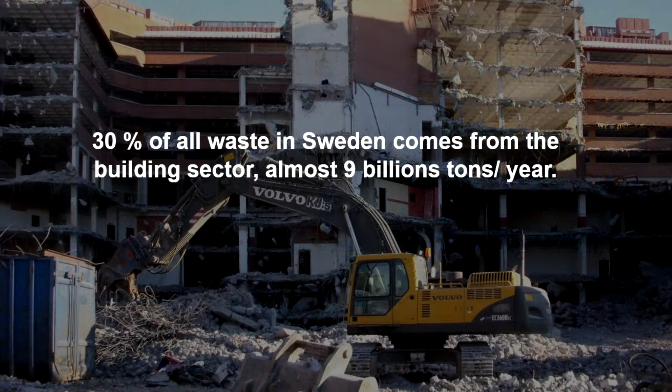And also, 30% of all waste, and I'm talking about Sweden here, comes from the building sector as well, and this is general all over the world. So we also have to take care of the building stock that we have and see: do we need to tear buildings down, or can we repurpose them so that they can live on longer? And of course, when building new, we should make buildings that people actually want to live in for a very long time, so we also think about the next generations that will use these buildings.

White is a really big firm, about 800 people, working in lots of different fields within architecture. But we're gathered under one vision, and that is for all our projects to be climate neutral by 2030 through design excellence, following the Paris Agreement and reducing the environmental footprint. We believe in enabling sustainable life through the art of architecture, and we span from housing, offices, hospitals, schools, urban planning, landscapes, to interior design.

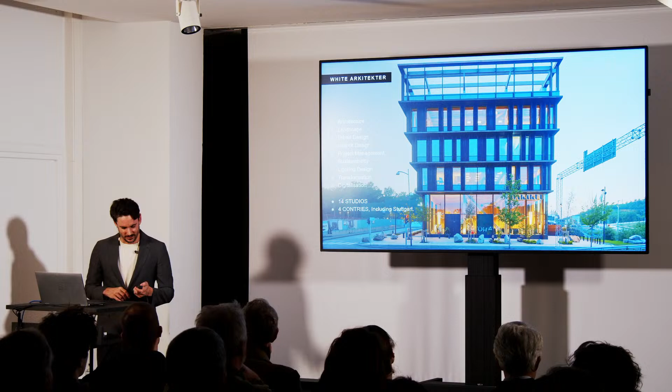We also work with a lot of sustainability and digitalization experts in a holistic approach in all our projects, from the very beginning of the design process to the end of the project. We like to collaborate, so we have all these different disciplines in-house. We are 14 studios in 4 countries, and we just started a studio in Stuttgart, which is quite small yet, I think 8 people or something, but we were commissioned for a big hospital outside of Stuttgart. So I think that's our main building in Germany.

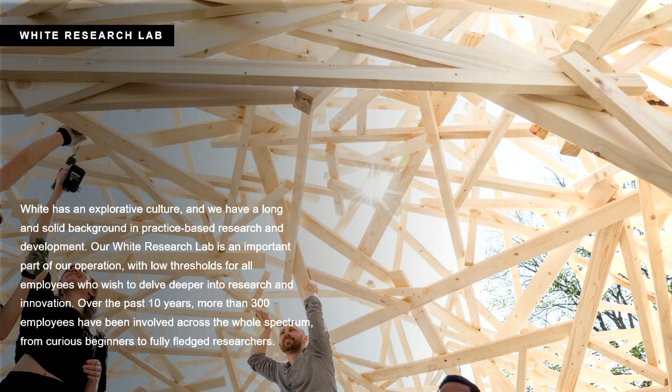We are employee owned. So when you start at White, you can buy in shares, and then we have a program that the longer you work there, the more you can buy in, and after a while hopefully you get a partner. So basically we can do whatever we want with revenue, and we like to reinvest it back into our office, basically. And we channel that through White Research Lab, we call it.

And then we have different focus areas where we study mostly project-based research, but we collaborate with scientists and Swedish research institutes as well. And one of these channels is timber, and that's the background, basically, of how we're investigating the use of timber and the characteristics of the material in new projects as well. As a result, the Sara Cultural Centre is one example of that. We also have other examples.

We're trying to find not only timber, but also, for example, here we have a rammed earth that we are using for stabilizing walls. And this is in a hospital we just won somewhere in the UK, where the most part is going to be timber, but also this rammed earth, which is locally produced in this region as well.

And here you can see the interior of the common areas in this cancer clinic, basically. But then there are parts that are not able to work with timber, so then we have to use concrete. But then we're trying to find a typology that has the lowest impact on natural resources and CO2 emissions. Another project that I'm working on right now was a competition win in Riga, Latvia.

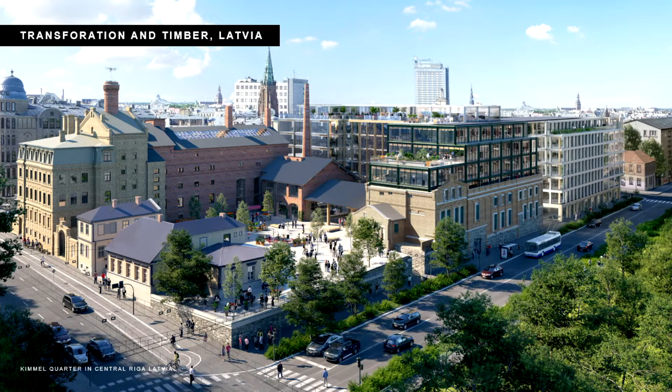Here we have a combination of timber offices, a new build, and the transformation of an old brewery. This is in the city center of Riga. It's about 50,000 square meters. And here we are pushing the national legislation on how tall you can build in timber. So we're trying to make the authorities approve, and they already have actually, us building 7 stories in timber with exposed timber

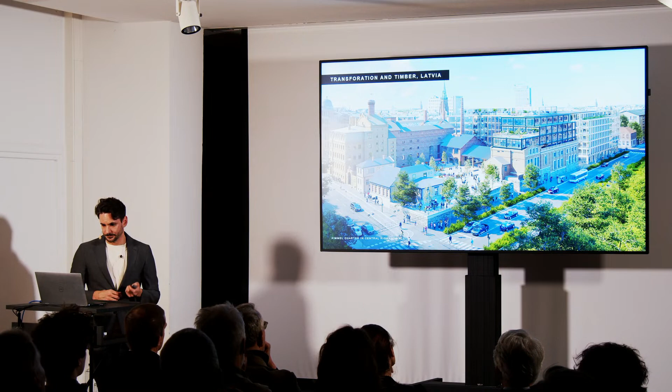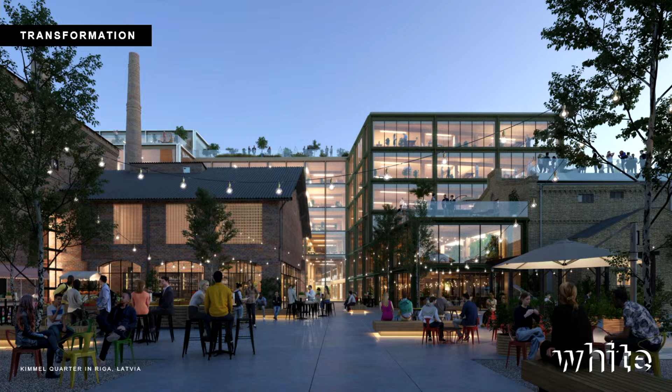in Latvia. And also here we have a holistic approach: not just the operational energy, but also how we're placing the volumes to make as low impact from this building as possible, or the emissions. And also how we can convert and save as much as possible of the old brewery as well. And here you can see the transformation, with the old and the new together to create this living hub for the residents of Riga, basically.

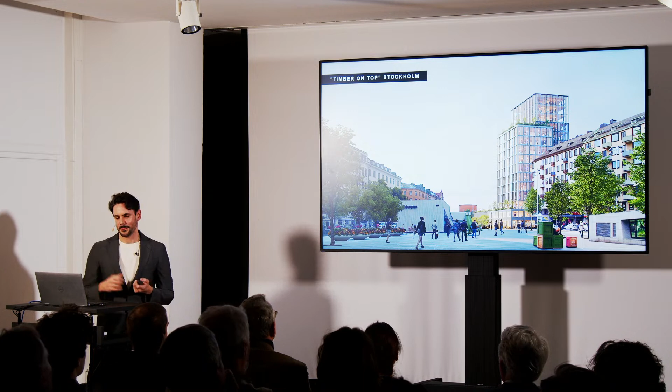This plot is an existing tower from the 60s, which has been worn down, the facades are broken, and the floor-to-floor height is very low, so it's not an efficient building. So the client decided, let's tear it down and rebuild a new one. And our proposal was, why don't we use timber as a construction material instead? And the location is very central, in the absolute center of Stockholm.

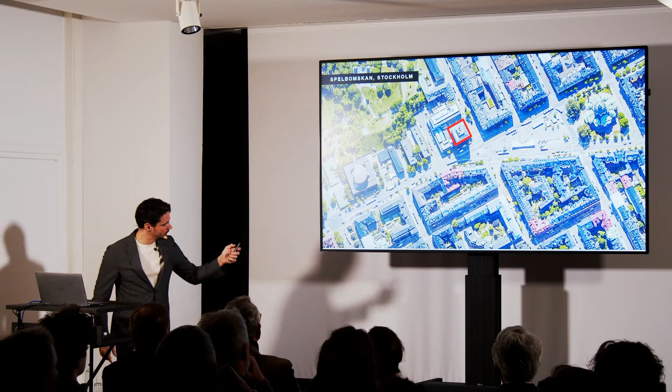And here, I can try this one. I heard it was really hard to.

Here is the Asplund City Library, which is very famous in Sweden at least. And it's an iconic building, so it's a very sensitive area to work with. But our proposal was to only tear down everything above ground. As you can see, there's a basement over 5 stories down, and underneath that's the metro. So it's a very complicated situation.

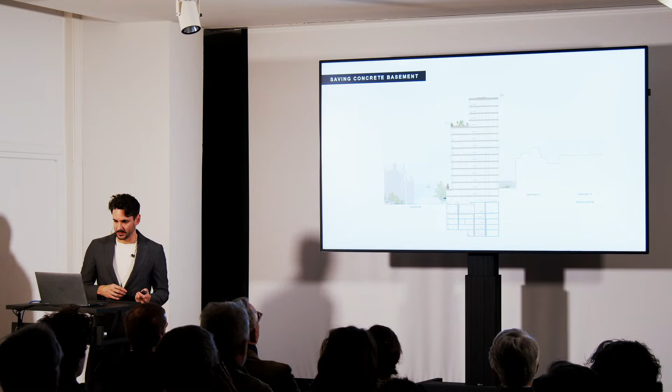And by doing this in timber instead of concrete, we were able to save the basement, and therefore also save the emissions that would have come if you had taken that away and rebuilt it again. And also you get a new atmosphere and a new vision for the entire situation at Odenplan, as this is called. And yeah, this is just a plan. I hope you can see it.

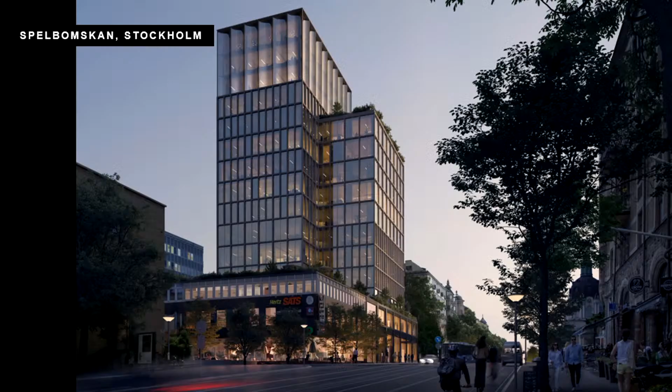It's a quite structured plan where we're working on optimizing the spans of CLT and glulam pillars, trying to stabilize with only one core. And also this is a vision for how this could be realized, basically. I couldn't find a before picture, but we're trying to work with the old aesthetics, but with a new appearance. And this building is a little bit taller than the previous one.

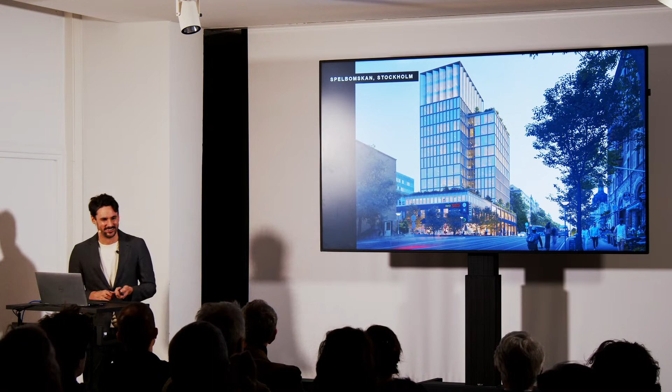And hopefully it will be standing in 2028, but we'll see. It's a long process. But today's main project is Sara Kulturhus. This opened last year, and I've been traveling the world since talking about this project, which I'm very happy and honored for. But also, the people of Skellefteå are really proud, and they also travel around the world

and talk about this. It's 20 stories, 75 meters tall, a locally sourced FSC-certified mass timber building. It's a culture center and a hotel, and the thought is that together they are going to benefit from each other. And it's one of the keys for the city of Skellefteå to break a downward trend of depopulation, become a more attractive region, and grow from 70,000 up to 100,000 people over the next 10 years.

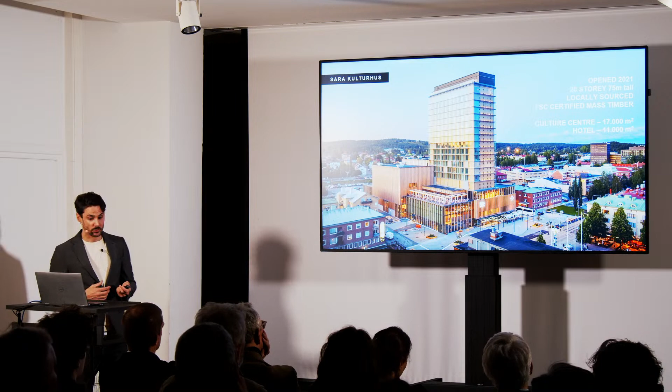It's surrounded by forests. So basically, Skellefteå is where it is because of mining and the forests. Sweden in general is 70% covered by forest, and 95% of that forest is managed forest. So we have a long tradition of working with timber and also working sustainably with timber. We are replanting every tree that we take down. We replant with at least two. So there's been afforestation in Sweden over the last 100 years. There are much more timber sources now than we had 100 years ago.

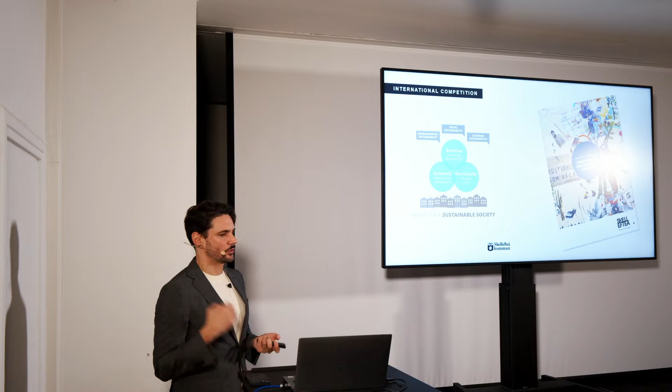So with that in mind, we entered the open competition in 2015. It was launched by the municipality, together with Swedish Architects. It didn't say anything about the use of material in the brief, but Skellefteå has this strong timber heritage, a strong timber industry; they had one of Sweden's first CLT sawmills, for example. And part of the university in Luleå has its timber branch located in Skellefteå. So yeah, they know their stuff.

The site is the last unbuilt site in Skellefteå, and it's the most central site as well. It was actually planned as a public building when the city was planned 120 years ago or something. But they couldn't really find a good solution, so it ended up being a bus station instead. The site slopes down from the train station towards the main square, and then down to the Skellefte River.

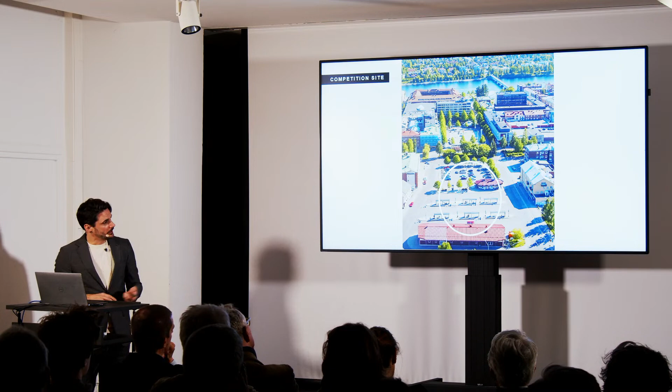So this gave us the opportunity to use a split level, with two public floors with access to the surrounding streets. Our concept was to work with all the stages. It's quite an intense program, but we placed the stages side by side in the center of the block, and the cultural program fills the entire block around it, facing the street, so that people could take part in what was going on. The building becomes bigger than it is, with entrances all around the block, creating no backsides.

We're also working with adjusting the scale and height to its context, and connecting this building, because it's quite a big building and it will change the scale of the CBD of Skellefteå. But we wanted it to be part of the existing as well, even though the city skyline will change over time as the city evolves. It was also important to create new public spaces for the inhabitants of Skellefteå, so that they can explore the city from a new perspective.

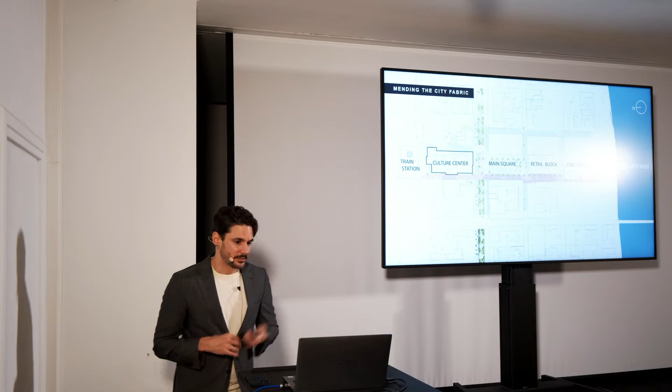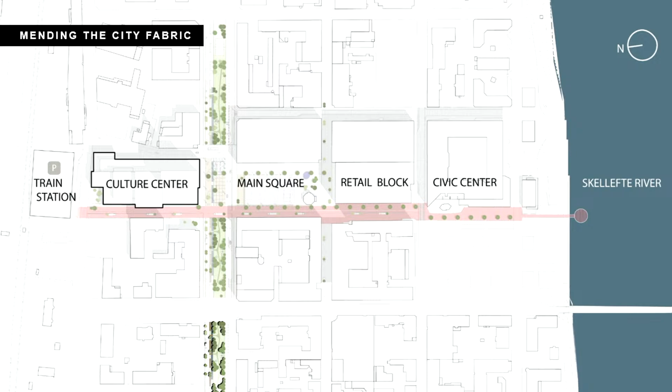So basically, the Cultural Centre takes part in mending the city fabric and becomes a destination that runs further than the actual building. And the pink line here, following down to the Skellefte River, is like a culture walking path instead of cars. This is going to be like a culture Broadway, following down to the stage located in the water.

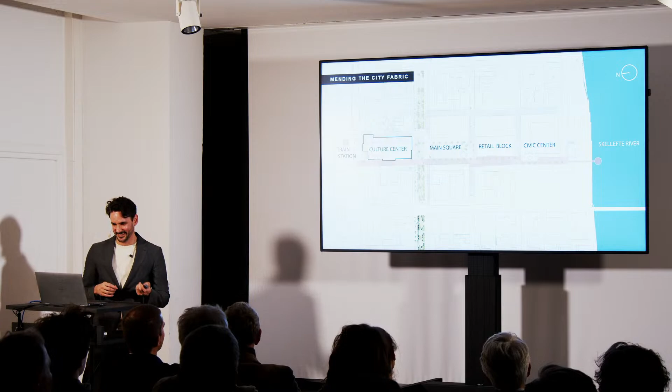Mending the street. We wanted to work with timber in the design, and we wanted to expose as much timber as possible in the facades, but we also wanted people to see what was going on inside and experience the timber inside as well. So we had these big glazed windows, letting all the expressions inside come out and lure people and passers-by into the building. So even people who are not interested in or don't know about culture, we want to attract them as well.

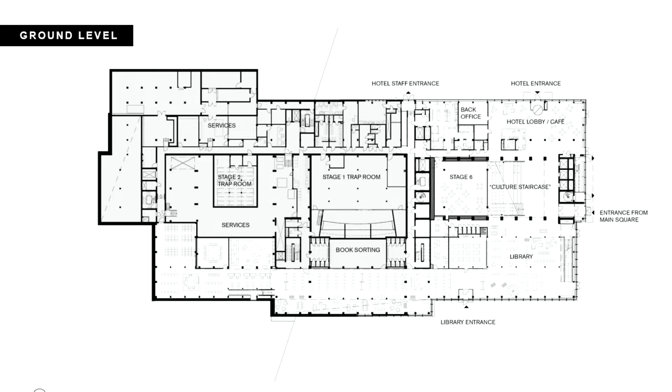So the ground level, or the lower split level, facing the main square, you enter underneath the high-rise, and then you come into this really big hallway, which connects all the different functions in the building. Here we wanted to put the hotel lobby, the cafe and the library, the source of all-day living, a flow of people walking and crossing.

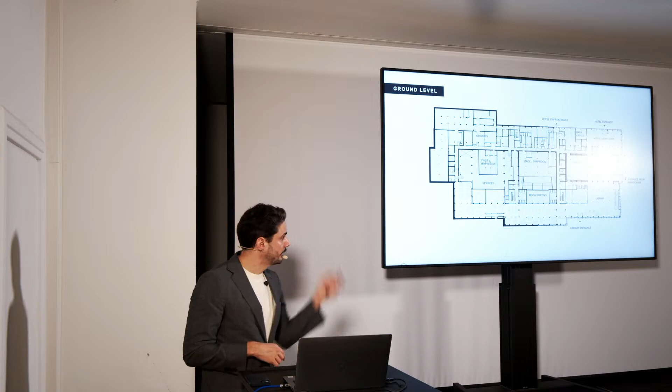So it was very important that the library took place in this corner, and it's not an enclosed library. This library is connected throughout the entire cultural center. There are no boundaries. You can borrow your book, sit anywhere and read it, and then have a coffee at the cafe or the hotel lobby. So you feel that you are under one roof, under the culture center, whether you're a guest at the hotel or someone borrowing a book.

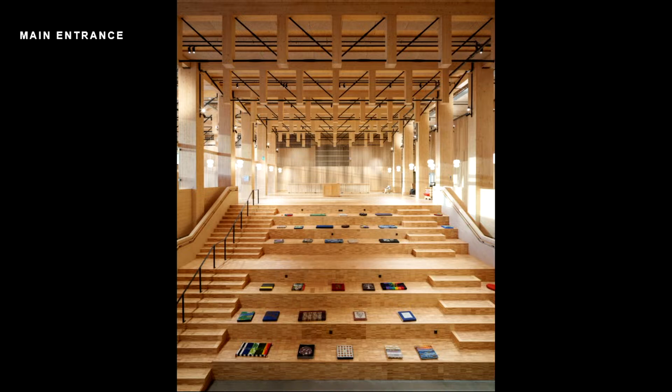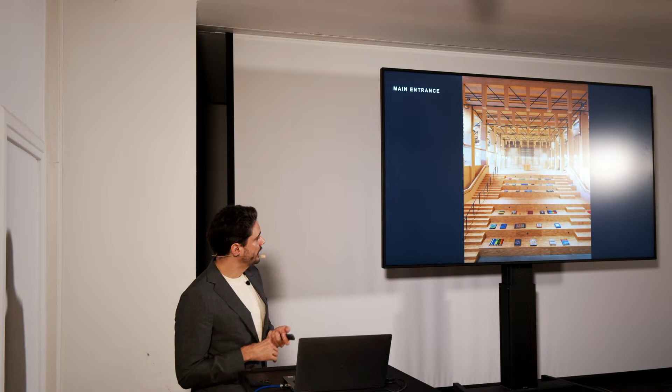So this is the main entrance, and here we placed, like in most projects, a social staircase. But in this case, it really connects all the different functions and enhances flow throughout the entire building. And you can see the supporting pillars taking down all the forces from the high-rise on each end of this staircase. Here we had to handle quite long spans so that we could have flexible spaces in the culture center.

So we used a combination of steel and timber, timber taking the compression and steel taking the tension. But it also gave the culture center a character and a signature, so that whenever you were inside the culture center, you had these trusses guiding you along.

It's quite a diverse program in the culture center part, which is the entire lower part of the building, and it's basically five stories. But some parts are only two stories because the ceiling is really high. There are four already existing operations that moved into this building. They were scattered around Skellefteå and had their own identity, so it was also a challenge for them to give up some of their identity to get a new one together with all the other operations.

So there was also work we had to do so that they could feel at home right from the start. And part of this project was that, to move in, they had to give up not just their identity in the building, but also some space. So they got 70% of their space moving in here, but they could use 130% or 140% of the space, through the common space inside the building, which is quite unique.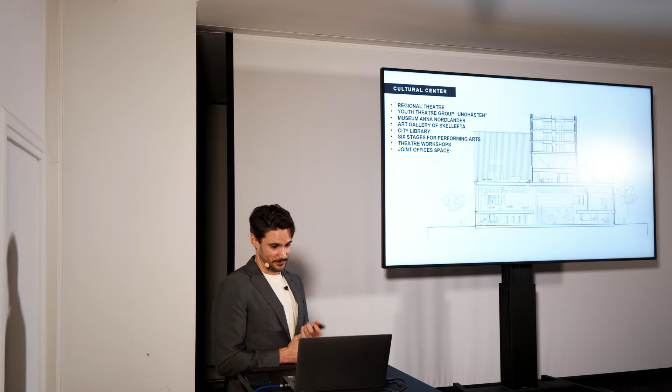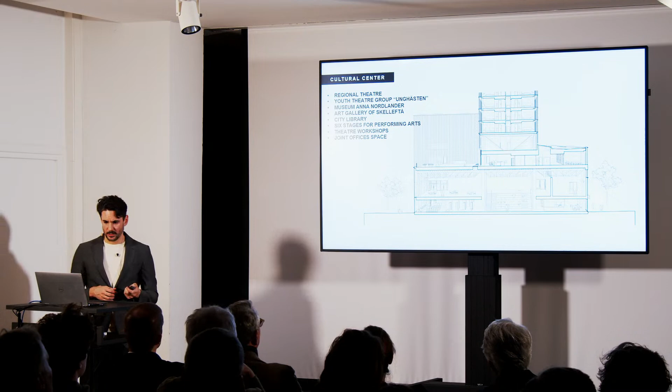So we designed the building so that all these operations could work alone, but more importantly, they can work together and collaborate, or expand and be more public and be in the center of the city. So it's the youth theater Unghästen, a museum, Anna Nordlander art gallery, and also the city library. Then we have 6 stages for performing arts not connected to any of these operations, plus theater workshops, joint office spaces, and back of house production areas. It's about 17,000 square meters in total.

Here you can see the connection to the library and then up to the great foyer and the stages on the upper level, and also all the exposed timber. Most of the timber here is constructional timber, CLT and glulam. That's the grammar and the architecture of this building, and how we built it.

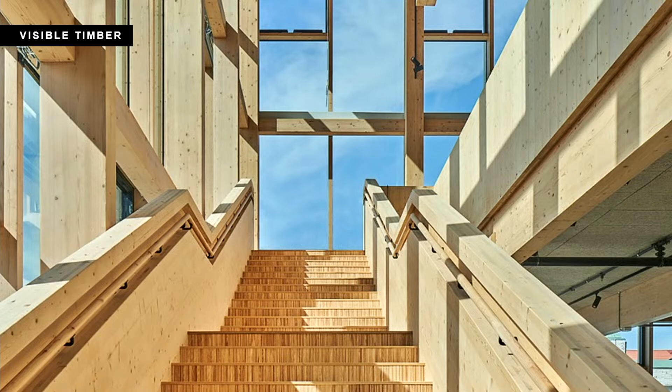It's all the way down to staircases, to railings. We tried to work with this because everything is prefab. We wanted to work with the elements so you could understand how they are assembled, and hopefully that enrichment will get people interested in design and construction also. But all these different parts become something bigger.

So the theater level is the upper ground floor level, basically, where the entrance is towards the train station in the north. Here you can see four of the stages in the building, and they are connected to each other like this, so that they could really work together. Then there is a back of house above that.

But basically, you can walk around the building all around here, and there are a lot of different staircases and pathways, so you can divide this in different ways and utilize this building in many different ways. And also you have the exhibition space.

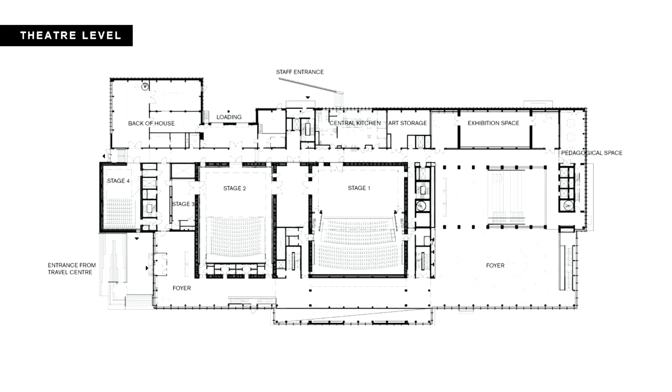So the foyer becomes the lung of the building, basically. That's where, from stage one for example, if you have a convention, then you have the banquet outside in the foyer. But usually it's used by the people living there as a rehearsal space, for example. And there is also an exhibition at one end of it, so it's also part of the everyday life.

And it's with these glulam pillars and the canopy of trusses taking down the light, lots of daylight into this building, that allows for using it.

But in the heart of the building, of course, lies the grand auditorium. It's 1,200 seats, and it has partly retractable seating, so you can fit up to 1,500 people here, which is as much as the people living in Skellefteå, basically, so you can fit the entire city in here. And it's full, sold out every weekend with new artists coming to this part of Sweden, so it's really a wise investment for the city.

And also here we wanted to see how far we could push timber into the interior. All the supporting walls and the trusses holding the roof and the ceiling are timber, CLT and glulam. The balconies and the seating are also timber.

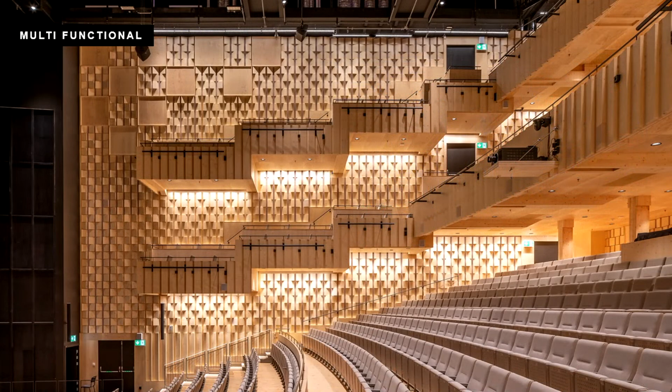So we had to work a lot with this, but all the way down to the acoustic panels, made from solid timber blocks, and this was something also from the beginning. Everyone said, no, we have to have CE-marked or approved products when working with acoustics. And we said, no, we can do tests instead, and then we could work with that. It turned out really good just to use a simple timber block instead, and much cheaper as well.

And then moving on to the hotel and the tower, which is a hotel, 20 stories, 75 meters, but it will shrink about 12 centimeters in 2 years, I think. The good part is that everything is made from timber, so it will shrink together. It has 205 hotel rooms, a conference center, gym, rooftop spa, and 3 themed restaurants - one on the ground floor, one on the plateau, and one on the top, basically.

And here you can see this model we made for an exhibition in London. We were invited for the summer exhibition at the gallery, or the national - I don't remember the name of it. So it's a section through the building. Here you can see how it lands underneath the main entrance, and on the opposite side you have the great auditorium.

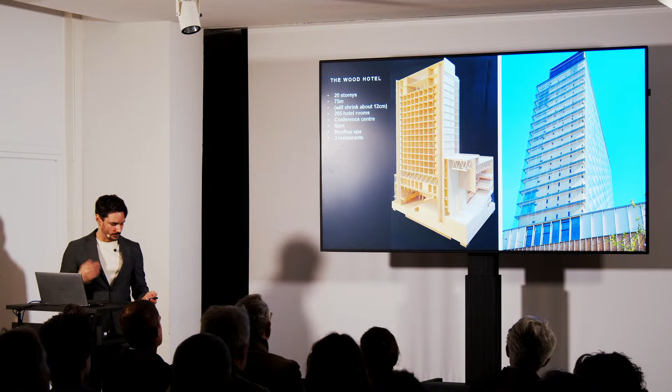The hotel plan is quite rational, and this was due to, in the beginning, there was this hotel magnate involved in the project, and we knew he was quite harsh and wanted cheap buildings. So we said, let's do this as rational as possible, but we turned it facing down with the short side facing the river, so that every hotel room was given a chance to see the river view. So there was basically no backside.

So it's 18 pods stacked on top of each other - I'll present this a bit later - in between 2 stabilizing cores instead of 1. This was the concept we made already in the competition phase.

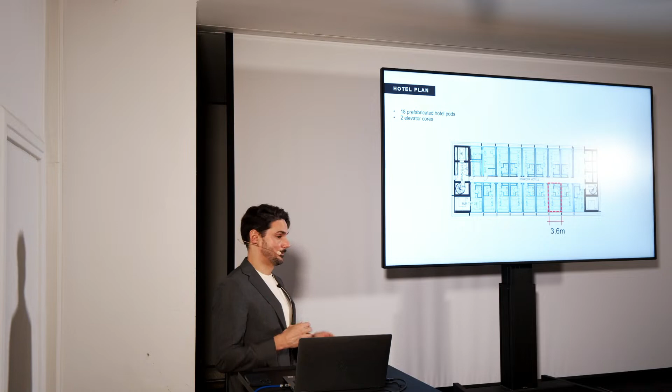We were collaborating with a structural engineer, Florian Korse, from DIFC in Oslo, so that we could ensure our solutions were viable in theory at least. Also, if this had been done in concrete, there would be so much waste of materials that we'd have to redesign the entire building if they wanted to alter it. So it was also something of a backup for us.

So this is the hotel room, and here you can see the exposed CLT in the walls and in the ceiling as well. It's made as a 3D box, basically. It also allows for this spectacular view overlooking the mist of Skellefteå - but it's like this today, so I think you can see it.

And the height is also giving a new perspective for the people or visitors in Skellefteå to overlook their own city, with public access to the upper floor, which is a restaurant and a rooftop spa with a lap pool on top of a timber building - which is maybe not the best solution, but it is here.

And this came in quite late in the process, but we managed that as well. Through the design process, the building also grew from the competition phase - it was 16 floors, but then someone wanted to add program, and we added.

In the beginning, 16 floors was the top amount you could build in timber, and then the client came and said, we need 2 more floors, and we said, okay, for us it was no big deal - we could just draw 2 more floors. But the statics said okay, we can allow for 2 more floors. And then this came in very late.

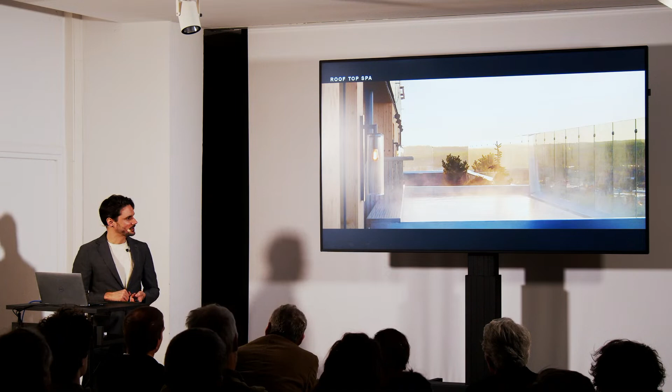We need another extra floor, or 2 more extra floors again. So we didn't change the design, but I think we could do 1 more floor with this design as well - but then it would be very hard for the building to stand.

So basically, a complex building like this is tailor-made to suit its purpose, but it's made from details and joints that mostly already existed, just in a much smaller scale. So this has really become a library of solutions that you can apply in every project, basically, both for residential and for offices, for example.

So we also have a lot of concrete as well, but in the foundation, in the ground floor slab, and a cellar. Above that, all of the horizontal load-bearing materials are timber, mostly glulam pillars and CLT.

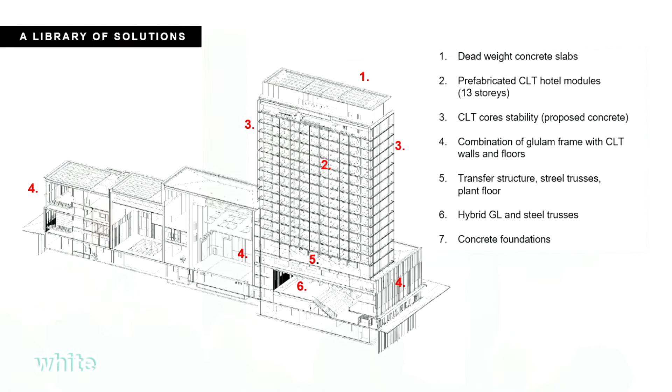And then to prevent the building, or the people in the building, from getting nauseous and seasick, we had to add weight on top of the building. So we have 2 floors with concrete slabs just to reduce the swayiness of the building. They're not there for the construction, they're there to prevent it from swaying too much. This is because it's rated as a residential building, since people are going to sleep there. But if this was an office building, we wouldn't have needed the concrete. So that's quite interesting.

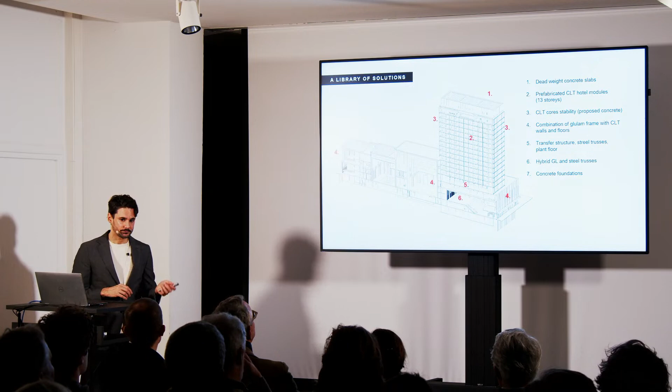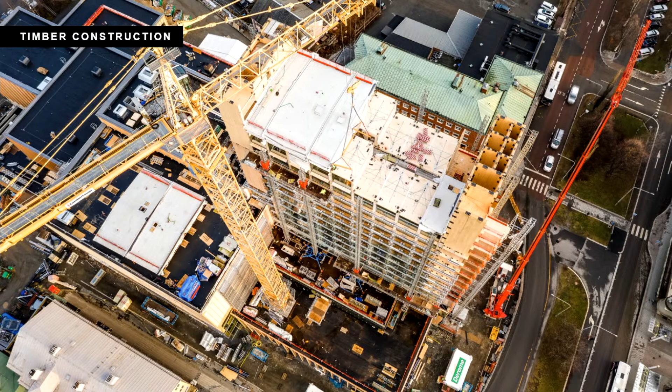So, timber construction. It went really fast due to the timber, and everything is pre-manufactured in the factory just outside Skellefteå. It took 73 weeks to assemble all the timber, and the contractor says we saved about a year of construction time doing this. So we could get back the revenue quite easier.

And also this was a silent working place. We had no complaints from neighbors. The carpenters working on the site don't want to go back to working with concrete, because it was such a nice atmosphere working here - silence, and also much less labor on site. We only needed 1 crane in this building, and then I already see 2, but 1 big crane at least.

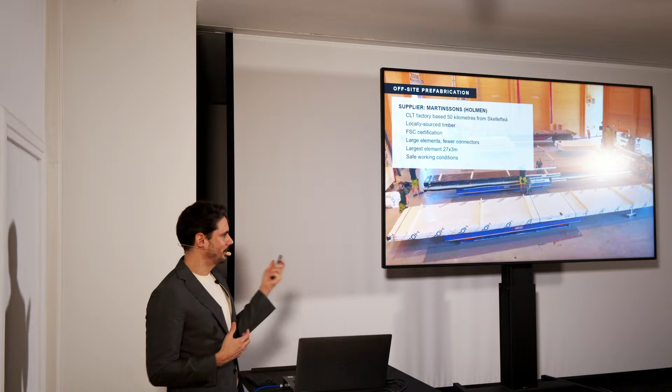The supplier was Martinssons, which is now bought up and called Holmen. It's a CLT factory and a sawmill just outside of Skellefteå. So we used locally sourced timber from a radius of about 120 kilometers around the site. Basically, most of the people in Skellefteå own a lot of land, so they have also been part of erecting this, part of the construction material in this building as well.

By doing this, we could do really large elements so that we have fewer connections, speeding up the process and the construction. The largest element we produced was 27 by 3 meters, and the heaviest one was about 13 tons - that was 16 by 4 meters, 41 centimeters thick CLT.

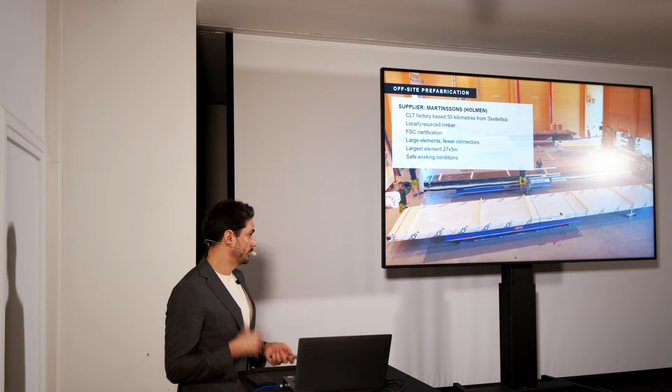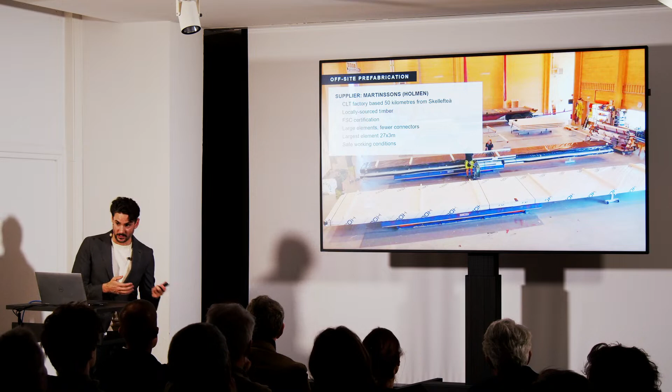And they follow, like working in a factory, safety protocols, safe environments, normal working hours, and all that. So there's a lot of benefit to working in pre-manufactured buildings. But in Sweden at least, we're quite used to this production, so this was not a big step for us working with timber, as it could be in other countries where you do everything on site.

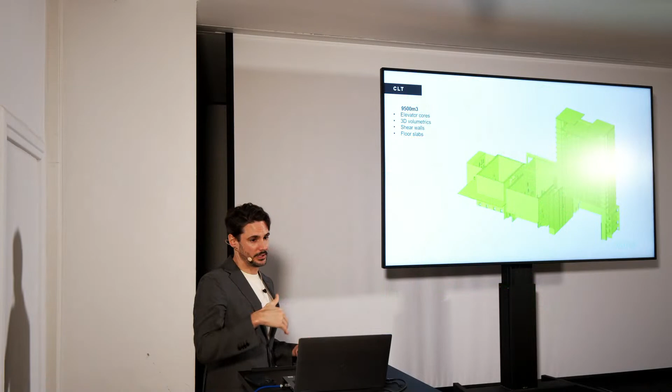9,500 cubic meters of CLT, where you can see all the stabilizing shear walls. We're using the walls around the big stages to take down the shear forces from the high-rise, and this was a little bit of a trick, because this is 20 floors tall.

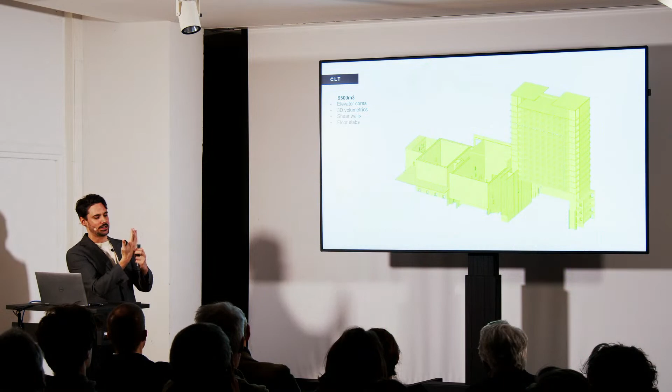...the acceleration in this building. So we have 3 different engineers doing calculations, and also the University of Luleå helped out to understand how stiff the building needed to be without breaking. So it's quite a complicated construction.

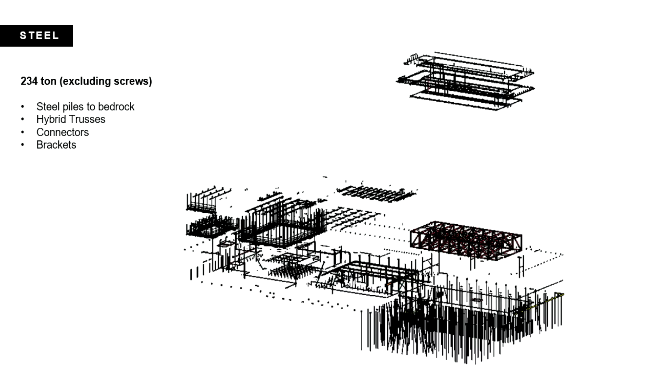Glulam for all the pillars and all the beams in the building, basically, and we also used it for trusses, but we had some steel as well - 234 tons of steel, excluding the screws. I think only in the tower we had 500,000 screws holding the brackets that support the elements. And we also had piles down to bedrock to support the structure of the building as well.

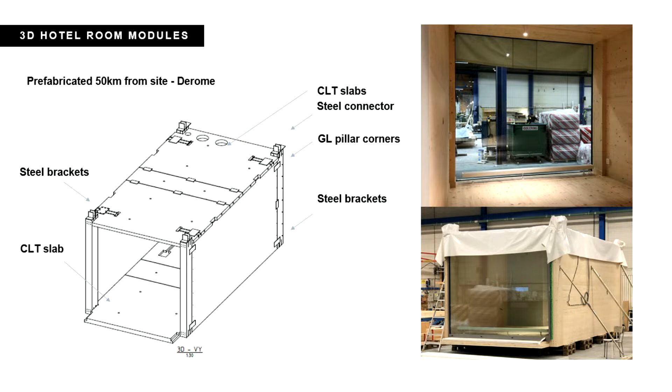So you can see here, in each end there are glulam pillars, which connect to the next module, like this. And here we also had a problem with the acoustics and the flank transmission of sound that we solved by doing this.

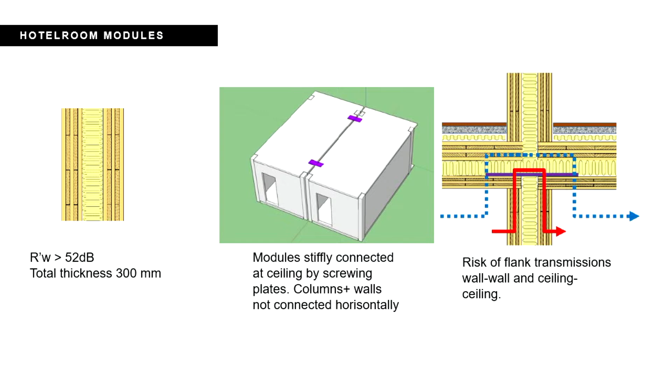So basically, the high-rise doesn't have floors. They have cavity or insulation instead between the ceiling in one room and the floor in the other one. But the total thickness is 300 millimeters between each room, and a little bit thicker in between the ceiling and the walls. I think it's 100, 100, and 120 for the floor plate of each module. And then on top of that, we have a floating floor for improving the sound insulation even further.

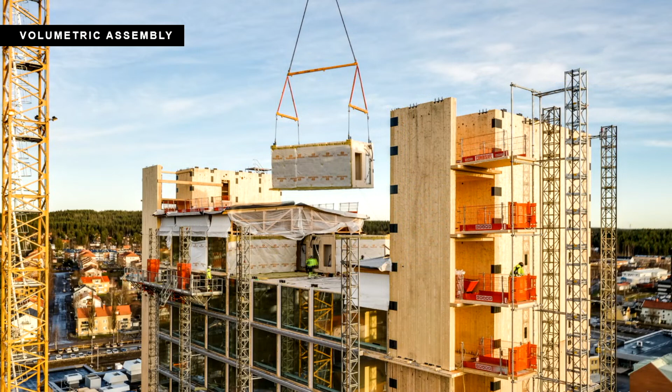And then you would just stack them on top of each other. So you could take 2 of these modules on one trolley and drive to the site. So you could do half a floor a day in perfect conditions, which is very fast.

I thought you were going to say, woo. Okay.

Okay, yeah. So the entire construction we did without any weather protection, except for these parts, because the modules come with their insulation wrapped around them already. So then we needed weather protection. But other than that, no weather protection at all. Instead, we divided the building into lots of sections. So we built it vertically instead. So we did one section quite fast up to the roof, and then the next one. And in that way, we could save a lot of time as well, and we didn't need the weather protection.

There are a lot of brooms in this project as well. Lots of snow that needed to be brushed off from the construction. So when the building was erected, we just added the double skin afterwards. We mounted it with a lift. As you can see, I don't know what to call it in English, but it was really very easy to mount the outer layer of the glazing of the building.

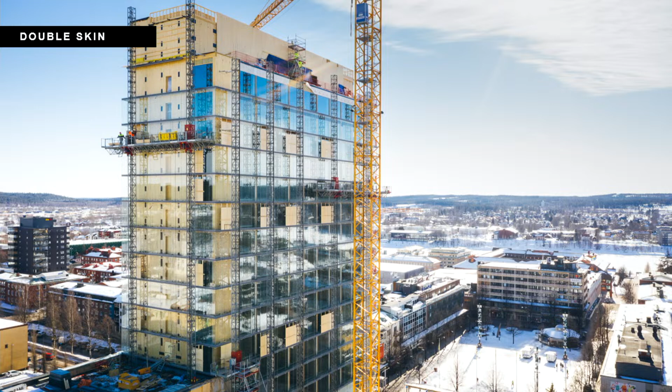It was essential for us to work in BIM, and we did so even in the competition. But from there, we worked with Revit for design, and for sustainability measurements. We worked with AR and VR for stakeholder involvement, so that the mayor could see what he was investing in, for example, and everyone was really interested in that. So that was a really good tool to visualize everything in.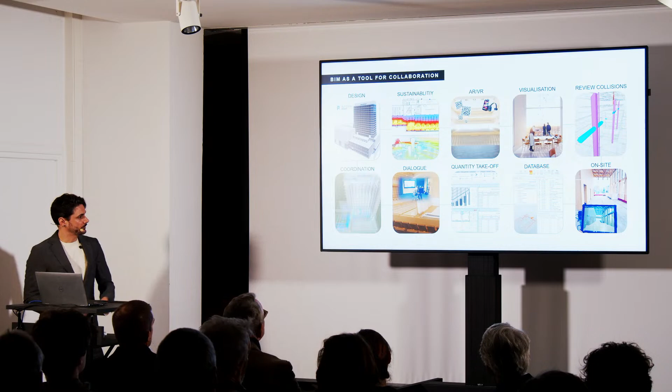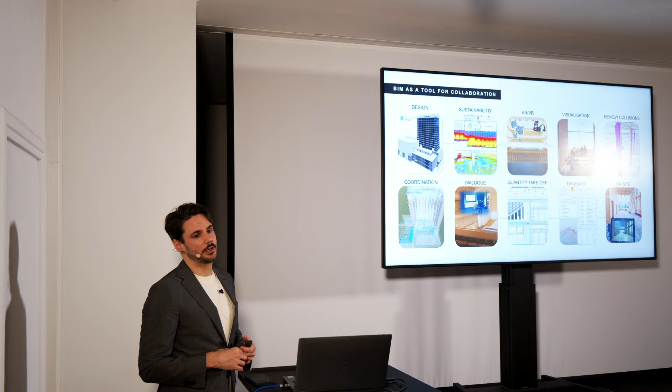And of course, most importantly, the review and collisions, so that we made all the errors in the 3D models, not on site. So we reduced almost 98% of all the errors, doing them virtually instead of in real life. Coordination, dialogue, quantity takeoff, database, and on-site, so that we could see that we did everything correctly. And this building was constructed during COVID, so no one was allowed to go to the site except the people working there. So it was really good for us to follow the construction while based in Stockholm.

Fire safety. So in Sweden, we have fire regulation which is performance-based, not material-based. So basically, the building has to withstand fire for a certain amount of minutes so that people can get out safely. And then you have to calculate that, but they don't care if it's concrete or timber. But we have to prove that you can apply that rule, basically. The hotel tower is R90, 90 minutes to get out safely from the building without collapse. And in the culture center, the lower part, it's R60.

So the entire building is fully sprinkled with a redundant sprinkler system. And this is basically needed by law in a public building anyway. So if we had done this in concrete, we would have done it the same way with the sprinkler system. And also we took over-dimensioned timber. So each timber slab has like 2 centimeters of extra material, so that they could withstand even more fire. So we have a lot of precautions to achieve the fire regulations.

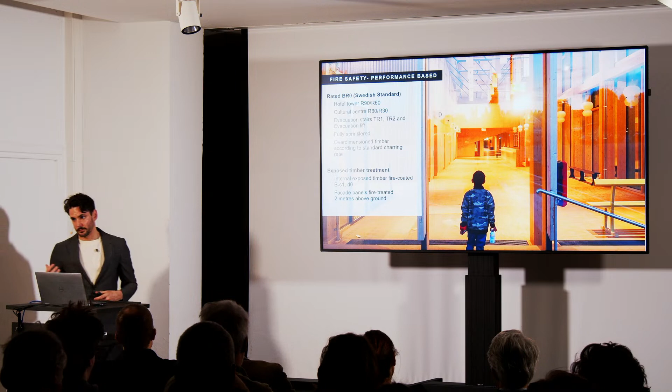And of course, this is a pilot project, so it would be very interesting to see, when you know more about the characteristics of timber and fire performance, if you can actually save more money instead of doing all these precautions.

Yeah, and all the exposed timbers have a fire-retardant paint. But we also use that, so it's a little bit of white pigment as well. Because it will darken the timber surface, so it's going to help to smooth that out a little bit.

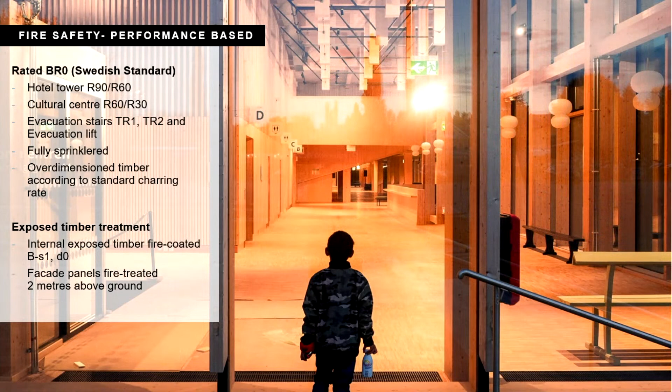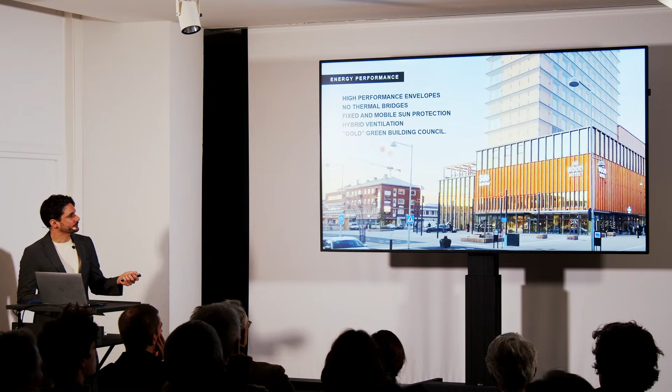High performance envelope with a double skin facade and 3-layer glazing all over. Working with timber, you get no thermal bridges. So we save a lot of cladding and insulation by only using 40 centimeters thick timber boards. For example, this is what you see. This is the core of the elevator shaft. So we don't have any insulation or anything. It's only the cavity and the outer layer of the double skin.

We're working with hybrid ventilation throughout the big foyers. And the building is certified gold with the Swedish Green Building Council, which is the highest level. And working with this building, the local energy company wanted this building to perform as well on operational energy as on the embedded carbon dioxide. So it runs on 100% renewable energy from the local hydropower company.

The energy system is connected to the city grid through AI, so that they learn how to best optimize this building's energy, but also their neighbors' energy, so that they prevent any of the buildings from getting too high energy needs, because they're working with peak shaving basically, so that you don't want to use bad energy.

You only want to use the renewable energy basically. Yeah. Batteries instead of diesel engines, from Northvolt, to work with, for example, the sprinkler backup system that you have to test every second week. So we thought that was a stupid idea to have a diesel engine in a timber building. We should have batteries instead.

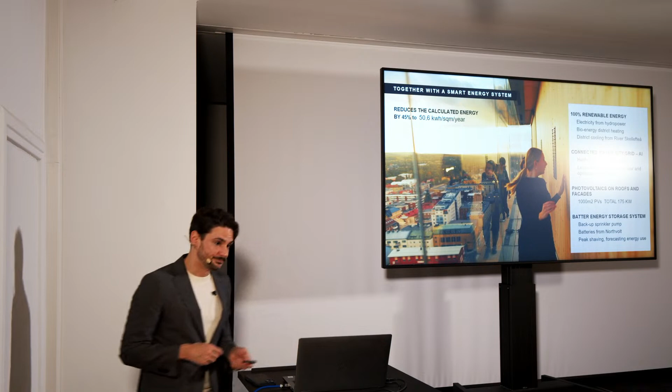And the environmental impact of this building, and of course our goal was to reduce the emissions as much as possible. Basically what you do is you look into the operational energy, the embedded energy from the building materials and how they were produced. And then you balance that with renewable energy, with sequestration, for example, if you're working with timber, and also with renewable energy outside of the property.

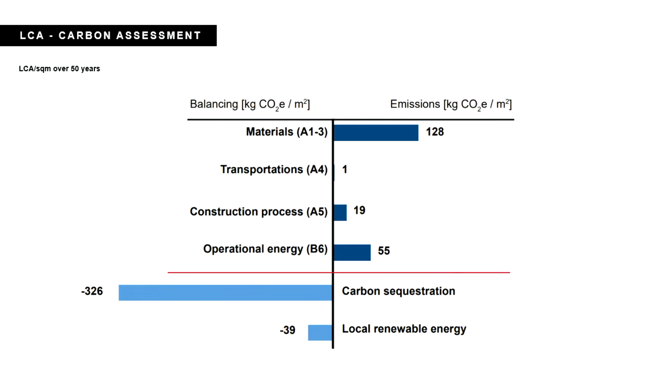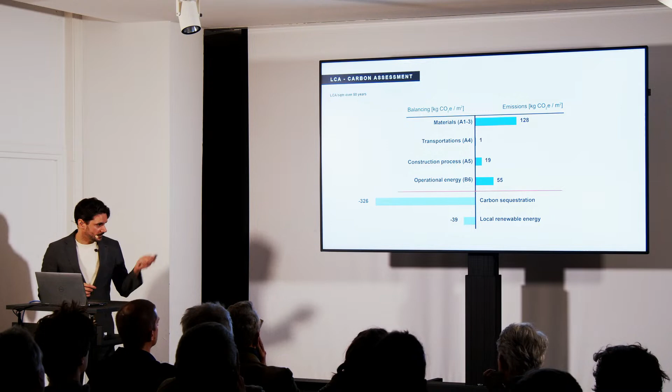After this building was built, together with the contractor, we did an LCA, a carbon assessment, to see what kind of impact this building has on our planet. And you can see it's quite low, so 200 kilos of CO2. But if you take the carbon sequestration into consideration, which is minus 326, this becomes a carbon negative building, together with the solar panels on the roof and ceiling. So the balancing is twice as much as the emissions in this case for the CO2 for the material.

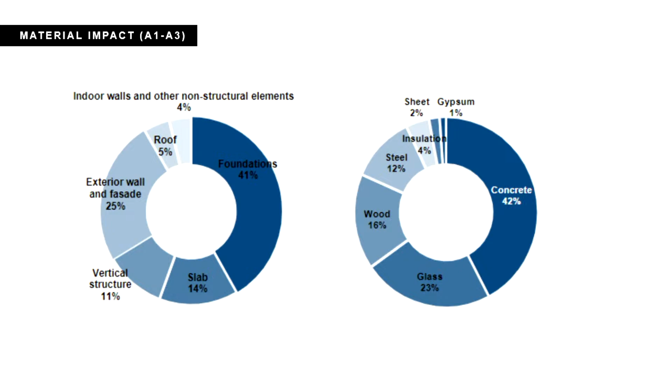And when we also looked into the different materials in the building, you could see that the foundations are 41%, but the concrete is 42% of the entire thing, even though it was only the foundations that we were using concrete in, and it still had that big of an impact. And then you can compare that to the timber in the construction and the structure. So you could see that there's a really low impact of timber in this building.

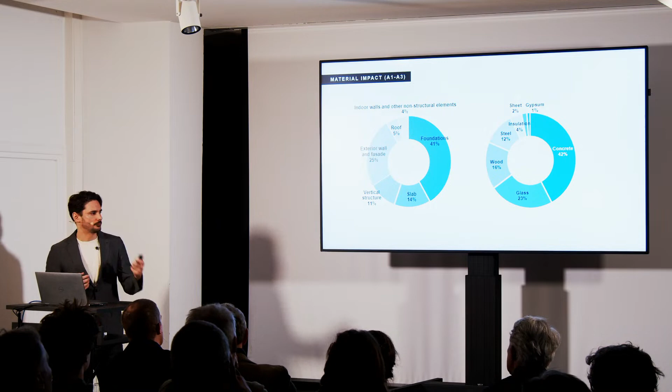But we also have to work with the other materials as well. The glass is quite high in this, and we didn't focus on trying to find low emission glass, for example, which we could have done, maybe in the next project. So there are a lot of things that you could tweak to make this building, or a building like this, even better, basically. But it's really good to get an understanding that all the different materials count.

And this was a really big investment for this very little city, and it was basically for them to find a new way to become a more attractive region. And by doing this, we also managed to convince the client: if you want to be this brave, you should also show the way of how to build sustainably. And it's really taken off.

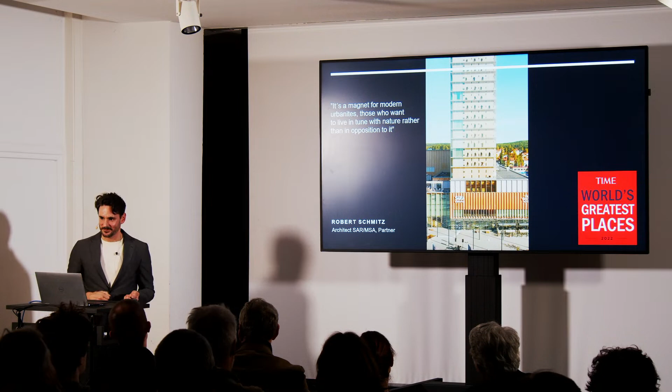And since the opening of this building, about 3,000 new jobs have been created in the region with the Northvolt battery factory moving up to this site. And they're saying that the Culture Centre was one reason for choosing this location. And Time Magazine named Skellefteå as one of the world's greatest places in 2022. So I think that's a good mark of how, if you dare, you can also succeed.

And I will end by showing a little video of how the people inside the Culture Centre also have new ways of using this building. This is a technical space where you're not allowed to go into, but it's still there.

So thank you very much. You missed in between a very clear wow. Yeah, and from my side there is a very loud wow and a very clear wow, because it was a wonderful, inspiring lesson you gave to us. And the topic of our workshop, which you attend tomorrow, fortunately, is how we want to build in the future. And I think this is a really good answer to this question. One answer, but a really good one. And I also thought I have to go to Sweden to see this building. It's very far away, no? Yeah.